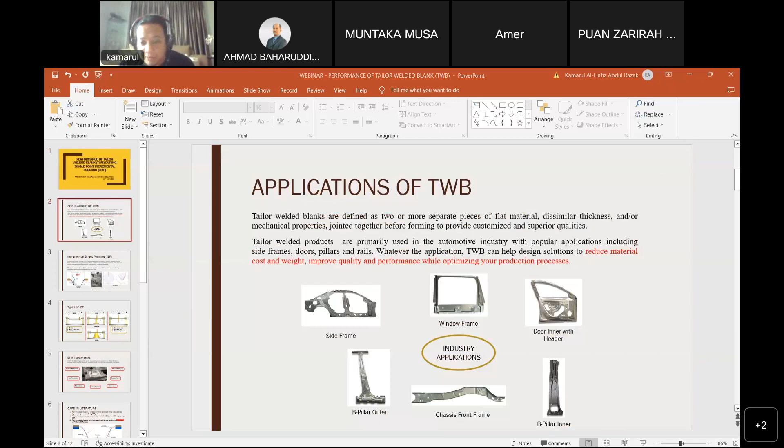Okay. Application of the tailor-welded blank. Sorry to interrupt. Can you change the slide? Yeah. Okay. Sorry. All right.

Tailor-welded blanks are defined as two or more separate pieces of flat material, dissimilar thickness and/or mechanical properties, joined together before forming to provide customized and superior qualities. This is the advantage of the tailor-welded blank. Tailor-welded blanks are also widely used in the automotive industry, including side frames, pillars, rails, and other applications. Tailor-welded blanks can help design solutions reduce material cost and weight, improve quality and performance, while optimizing production processes.

So this is an example of the application of tailor-welded blanks in industry. We have combinations of different materials or different thicknesses to reduce the weight of the body in white, such as the window frame, B pillar outer and inner, door inner, header, and chassis front frame.

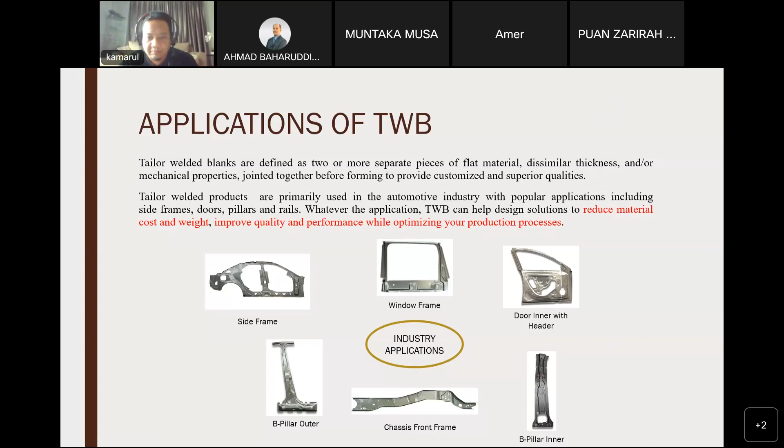Okay, I would like to share about the process of incremental sheet forming. Incremental sheet forming is a process in which a sheet is shaped into the final part shape by progressively applying small increments of deformation using a round tip or hemispherical head tool. Typically, the diameter of the forming tool is in the range of 5 to 20 mm. The tool is mounted on a CNC machine or robot arm, and its motion is controlled by a computer program that generates the tool path.

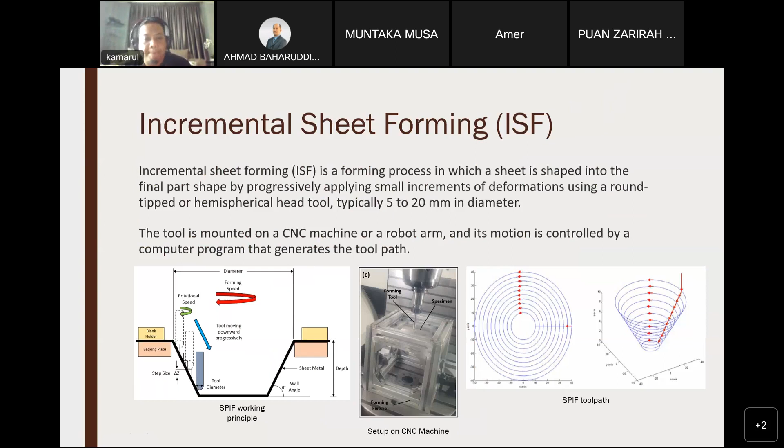Okay, before I go further, I want to share the different processes in ISF. In ISF, there are majorly three types of incremental sheet forming. The first one is single point incremental forming. Single point incremental forming consists of only one rotating tool and is a dieless process. So this is a very simple setup, and the process is without a die. The setup process is also easy, and the setup cost does not include the die.

By rotating the tool, then form the shape into a required design. The second one is two-point incremental forming, TPIF. Different from SPIF, TPIF has a die, but some researchers divide TPIF into two types: the first one is a partial die, the second one is a full die. So SPIF is dieless, without a die, but TPIF has a die, which is partial or full. And the third one is double-sided incremental forming.

Different from SPIF and TPIF, DSIF has two rotating tools at the top and the bottom of the fixtures. So both forming tools rotate and move together to form the desired shape. So DSIF requires highly complex programming and also high setup cost compared to SPIF and TPIF.

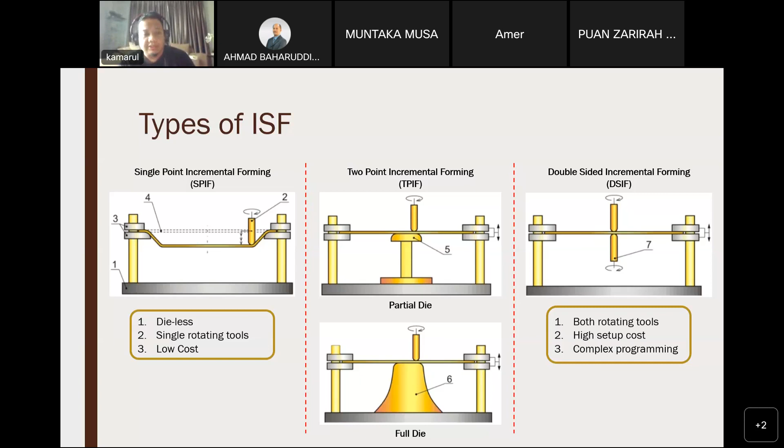Okay, my study is focused on SPIF. In SPIF, there are some important process parameters such as rotational speed, feed rate, step size, forming angle, or what some researchers call wall angle, lubricant, tool diameter, and sheet thickness. But in my research study, I just focus on four parameters, which are rotational speed, feed rate, step size, and forming angle. The other parameters I try to fix, such as sheet thickness, tool diameter, and the lubricant.

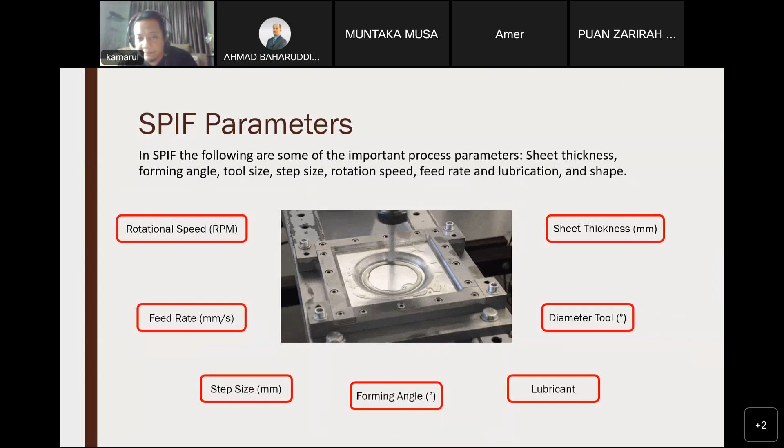Okay. Gaps in the literature. From the available literature, it can be summarized that there is a limited understanding of the input process parameters affecting SPIF performance. Number two, limited work has been reported on the dissimilar tailored AA6061 and AA5052 alloy using SPIF. And the last one, from the available literature, no or limited research work has been found on the springback of tailored blanks using the SPIF process.

Actually, this is quite interesting in my research study because it is quite novel, as I found when I made a study in my previous semester. There's very limited work on the combination of SPIF and tailored blanks. Several researchers combine the SPIF process with a tailored blank as a specimen, but almost all the research focuses on formability. But until now, I have not found other research that focuses on the springback that occurs when the SPIF process forms the tailored blank specimen.

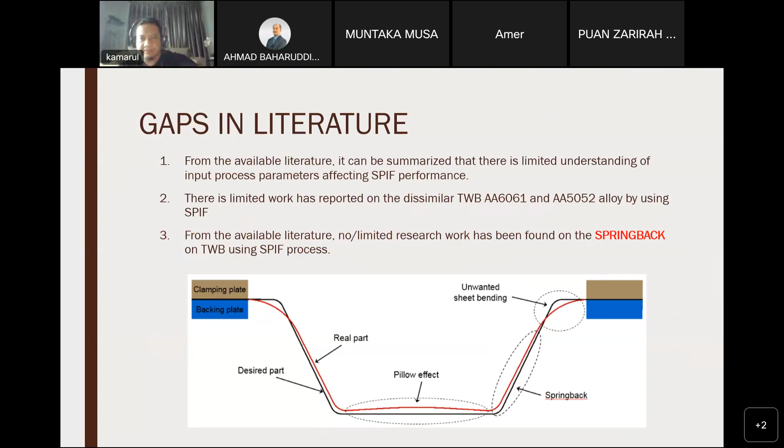So after we prepare the samples, the next step is to prepare the design of experiment using the Taguchi method. Like I said just now, I pick four parameters, which are rotational speed, forming speed, step size, and wall angle, with three levels. Then we try to run the SPIF process. If it fails, we try to make some alteration or amendment to the process parameters. And if the part is successfully formed, then I measure the springback angles.

So actually, for the parameters, I already made some research and also referred to previous researchers because, like I said just now, previous researchers focused on formability, but they still ran the SPIF process. So I take their parameters as a reference, but for some parameters I'm not sure whether they are valid or maybe have a typing error in that paper, because I followed several parameters but it failed when I tested on my specimen. So at that time I took several attempts to change the parameters.

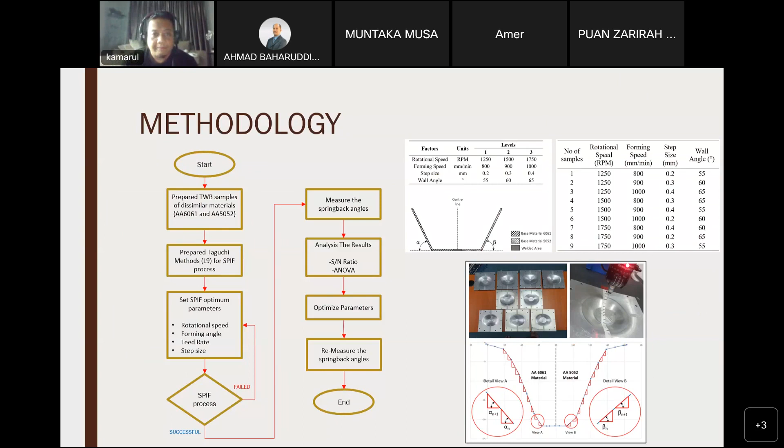Okay, the result. So this is how to measure the spring back: after we find the average angle of spring back, the standard calculation of the spring back is actual spring back minus design spring back. Then we find the actual spring back.

Okay, so based on the nine samples, sample 8 produces very little spring back on both sides. The 6061 material produces a slight difference between the actual and design angle, which is 2.285 degrees. For the other side, the 5052 material produces 2.6622 degrees, slightly different from the 65 degree design wall angle.

Okay, so on the SN ratio based on Taguchi analysis, we can see that for spring back on AA6061, the optimum value for rotational speed is 1750, forming speed is 900, step size is 0.2 mm, and wall angle is 65 degrees. Same goes for spring back on the AA5052 side. It also gives the same output on the optimum parameter. Both sides have less spring back compared to the other samples.

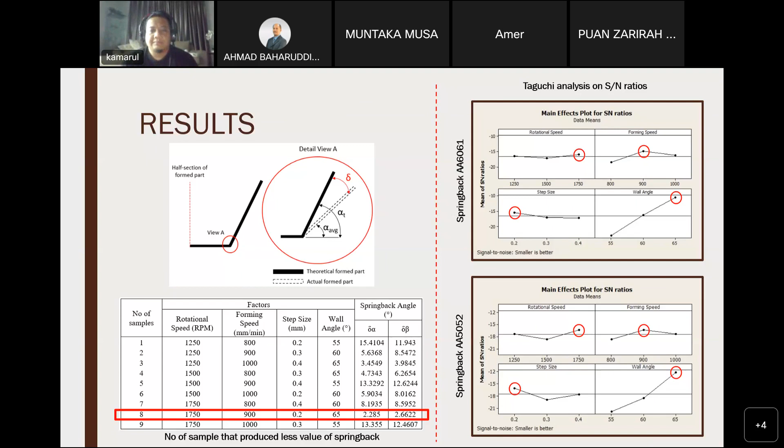Okay, as a summary, based on the Taguchi method, the SN ratio results show the wall angle is a significant parameter that influences the spring back compared to other parameters on both material sides. While rotational speed, in the last rank, shows it doesn't have a significant effect on the spring back angle. The ranking of the SN ratio will show the ranking of the significant parameters.

So for spring back on 6061, the wall angle is very significant. The second one is forming speed. The third one is step size, and the last one is rotational speed. On the 5052 side, they have the same significant parameter, which is the wall angle, and also the least significant, which is rotational speed, but the result is quite different between forming speed and step size. The optimal values for rotational speed, forming speed, step size, and wall angle are determined using the rank of significant parameters, like I explained just now.

Okay, then according to the ANOVA result, the wall angle has a greater percentage effect on the spring back angle of the formed tailor welded blank, which is 94.73% for mean spring back on 6061, and 93.18% for the 5052 side. That contribution is high because using ANOVA, we usually have significance at 95%. So less than 95% is a very high contribution.

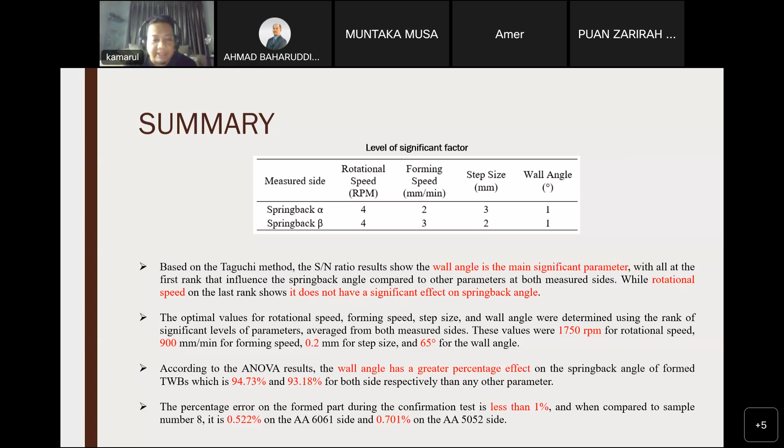Okay, this is the challenge during this process when I combine together the SPIF process and tailor welded blank. Actually, in this process, the challenge started when providing the sample itself, because when the material thickness is very thin, it's very difficult to weld. It's very difficult to weld due to the warpage issue and also defect issues during the process, because friction stir welding also produces high residual stress, and also the heat distribution.

So when the specimen is thin, 1 mm or less, the possibility of failure and warpage is very high. Whereas if our sheet is thin, 1 mm or less, it's easy to form. But if the specimen is quite thick, maybe 2 mm and above, it's very easy to weld. There is no warpage at all if we use 2 mm material thickness. But it's very difficult to form.

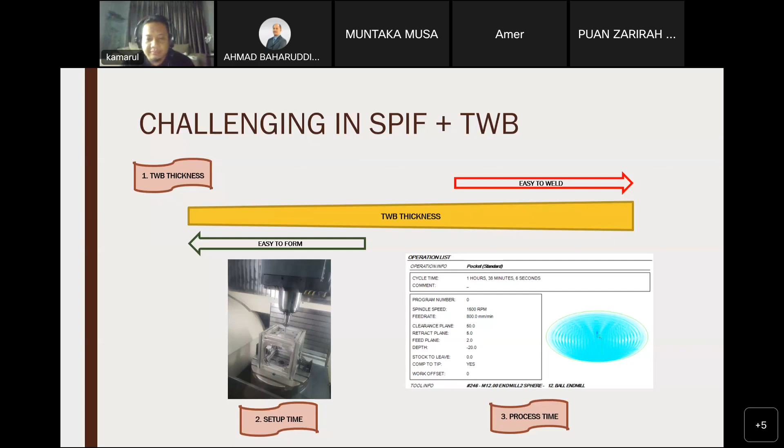Then any effect on the base metal, and also what is different between the base metal structure and the tailor welded blank structure. Is there any significant effect on that area? Because I will go into the thickness distribution and also the microstructure in that area. This is my next plan.

The second one, I would like to investigate the improvement of spring back angle reduction by a combination process, which means I try to introduce a new process, which is reverse single point incremental forming. The common SPIF is in one direction only, from the downward position only. But when I studied several processes, SPIF has a lack of geometric accuracy compared to TPIF and DSIF. DSIF and TPIF both have some force at the bottom of the fixtures.

So I am Amer Isyraqi bin Hussin, a PhD student from Metal Forming Research Lab, USM. Today I would like to share my findings from my current study, which is about the effects of joint configurations of tailor welded blanks on crashworthiness behavior. Before I begin, let me introduce a little bit about tailor welded blanks and crashworthiness.

Crashworthiness is the ability of the vehicle to protect its occupants during an impact or accident. The ultimate goal of crashworthiness is to protect occupants in a wide range of crash scenarios and reduce the risk of injury or death in the event of an accident. Side impact, also known as a crash test, is one of the most hazardous crashes, causing deaths and injuries around the world. The side impact on a car structure involves the roof rail, B-pillar, and sill.

One of the methods to reduce the risk during side collision is strengthening the B-pillar structure, such as friction stir welding for joining purposes or using advanced materials. In a study by Kelley, they found that scapular fracture or shoulder injury was influenced by the B-pillar in most cases of side collisions. Investigating the joint configuration of friction stir welding for tailor welded blanks is considered an alternative approach to enhance and strengthen automotive structures, thereby improving their crashworthiness.

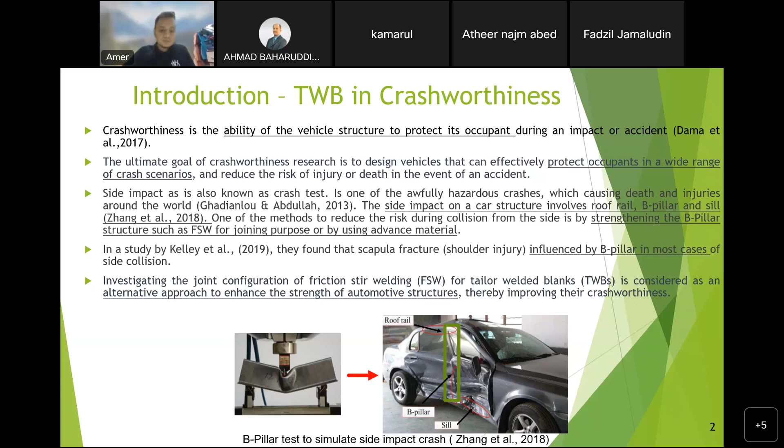It provides support to the vehicle roof, helps maintain the structural integrity of the passenger compartment, and serves as an attachment point for the seat belt and other safety systems. In some vehicles, the B-pillar may also house airbags or other safety features.

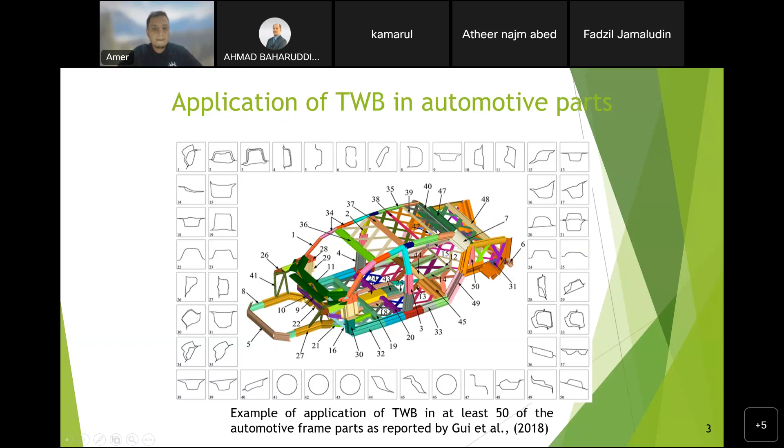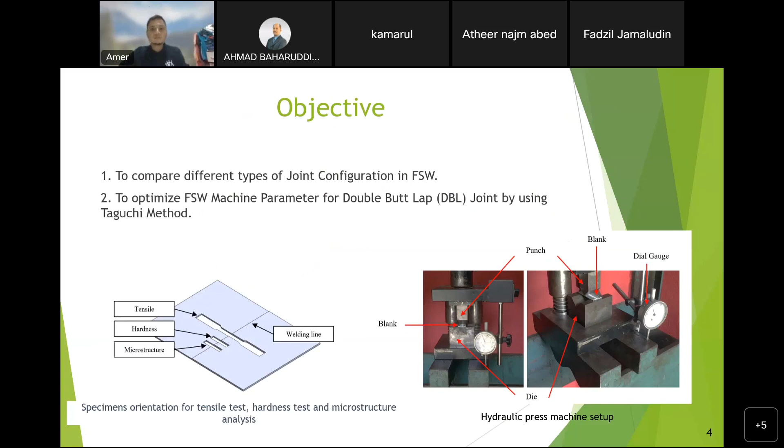Basically, the types of joint configuration in friction stir welding are the same as in arc welding. For example, the typical types of joint configurations are square butt joint, edge butt joint, T butt joint, lap joint, multiple lap joint, T lap joint, and fillet joints. On the right side is the joint configuration for the modified square butt joint, which has been improved to a new shape, called a scarf joint and double butt lap joint.

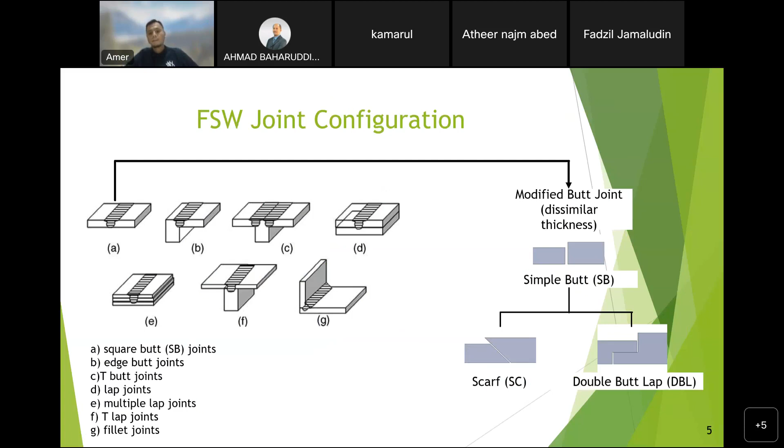So this is the methodology for my experiments. In order to make a comparison between the three types of joints, the same parameters have been used for tool design, material size, machine types, and machine parameter.

For the friction stir welding tool, I'm using D2 tool steel, and the shape of the pin is straight cylindrical. The pin length is 1 mm, pin diameter 5 mm, shoulder length 10 mm, shoulder diameter 10 mm.

For the variable parameter, different rolling angles are used for each type of joint. There are 4 types of joint angle combinations carried out: 0-0 degree, 90-90 degree, 90-0 degree, and 0-90 degree.

The material used for this friction stir welding comparison is aluminium 6061. The thickness for the advancing side is 2 mm and the retreating side is 1.5 mm. The dimensions are 200 by 90 mm. The three types of joint configuration for the comparison are square butt, scarf, and double butt lap joint.

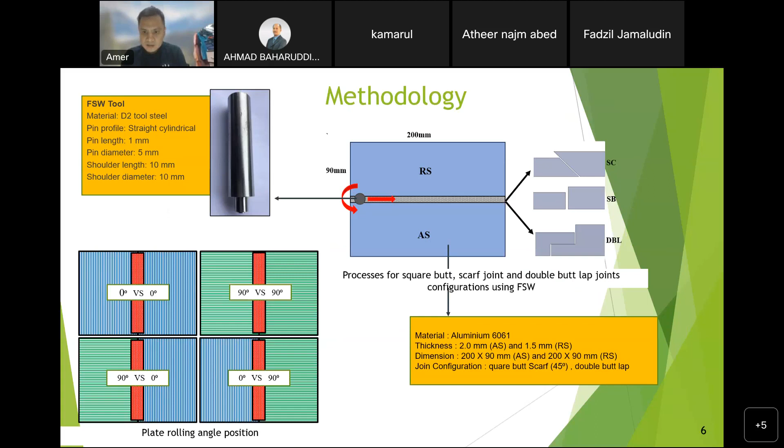So this is the flow of the experiments. Start with the friction stir welding process, then the sample preparation, and the last one is the analysis.

For the friction stir welding, I'm using a conventional universal milling machine. The fixed parameters for the process are spindle speed 865 RPM, welding speed 90 mm per minute, and tool tilt angle 3 degrees.

For the sample preparation for tensile, hardness, and microstructure, I'm using EDM wire cut to cut the specimen profile. For mounting or holding the specimen, I'm using a specimen mounting press, for microstructure and hardness tests.

Next is the analysis. The analysis is for comparison using the tensile test with a UTM machine, hardness test using a Vickers hardness tester, and microstructure analysis using an optical microscope and SEM machine.

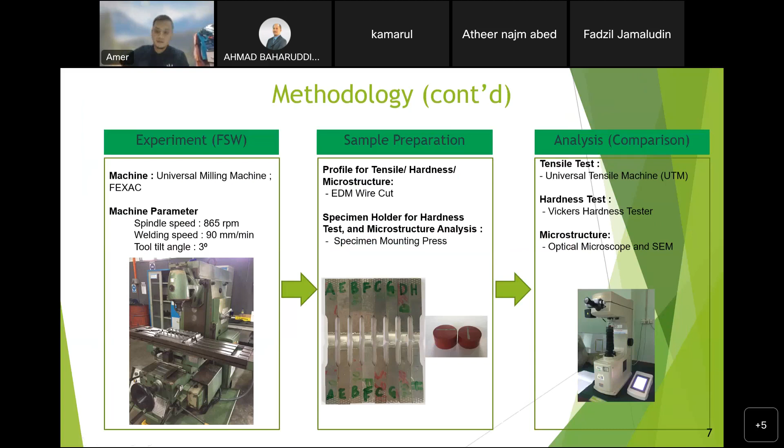So this is the results, comparison on ultimate tensile strength results. The UTS value for each rolling angle is different. From the chart, it can be seen that a combination of different rolling angle values gives a higher value compared to the joint that has the same rolling angle values.

We can see that DBL, or double butt lap joint, is better than square butt joint configuration by 3 to 11%, and much better than scarf joint configuration by 2 to 6%. The best rolling angle is the combination of 90 and 0 rolling angle for all types of joints.

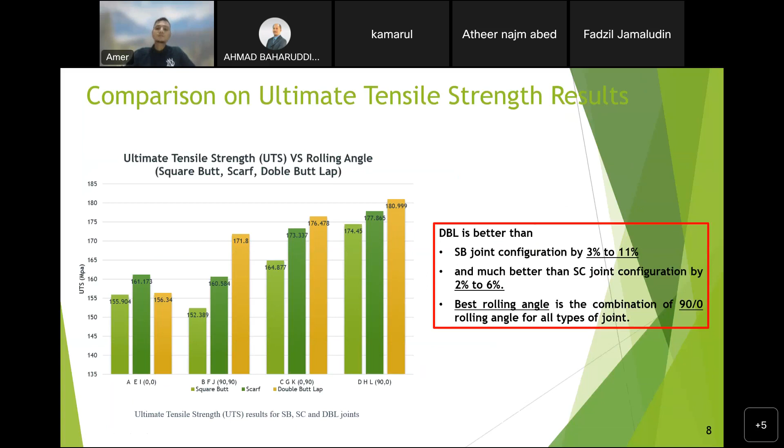Next is the comparison of the hardness HV results. To form the hardness profile, the hardness value is measured every 2 mm from end to end, including all the stir zone and material base area.

As we can see, by changing the geometry of the joint from square butt, to scarf joint, or DBL double butt lap joint, we can increase the hardness value on the stir zones. However, the hardness value between the scarf and double butt joint will not be significantly different.

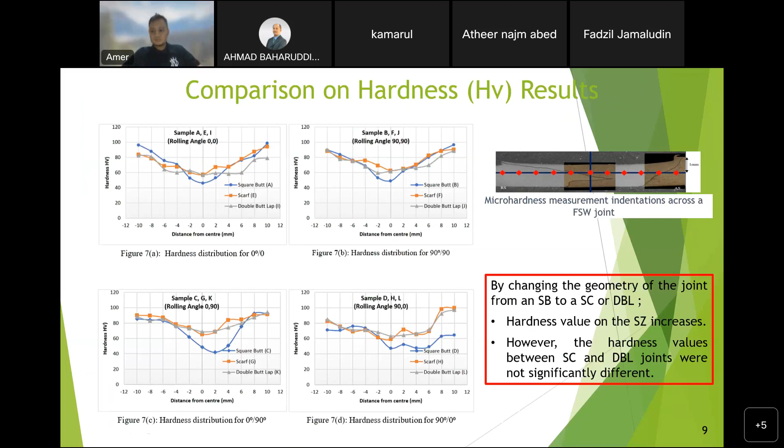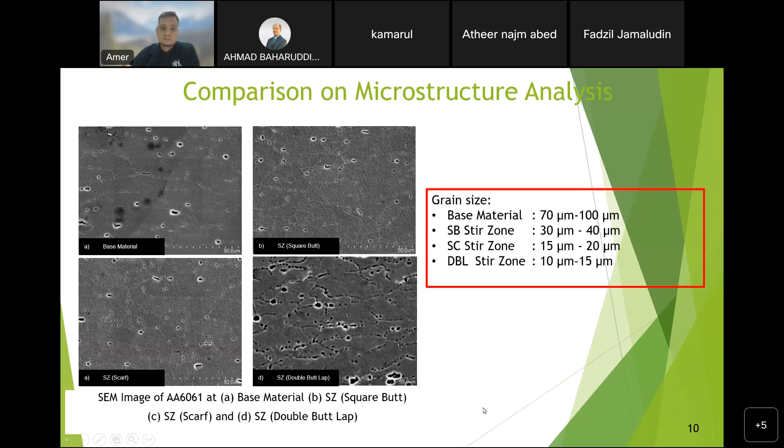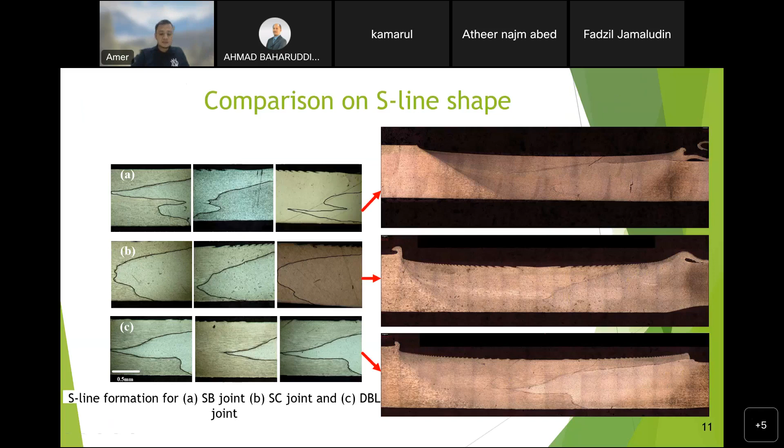So which of the joints is better: square butt, scarf, or double butt? Based on the tensile results, it was found that the UTS for the double butt lap joint is better than the square butt joint configuration by 3 to 11%, and much better than the scarf joint configuration by 2 to 6%.

By changing the geometry of the joint from square butt to scarf joint or double butt lap joint, it has been observed that the hardness value of the stir zone increased. However, the hardness values between scarf and double butt lap joint were not significantly different.

By increasing the contact area of the faying surface, the volume of material that needs to be pumped into the weld root is enhanced, resulting in optimal weld formation and consolidation in the weld zone. The double butt lap joint design has proven to be an optimal design strategy for increasing the faying surface, and as a result, improving the mechanical properties of the joint.

Apart from the rolling angle factor, the type of joint influences the S-line profile, where the profile of the three joint types differ.

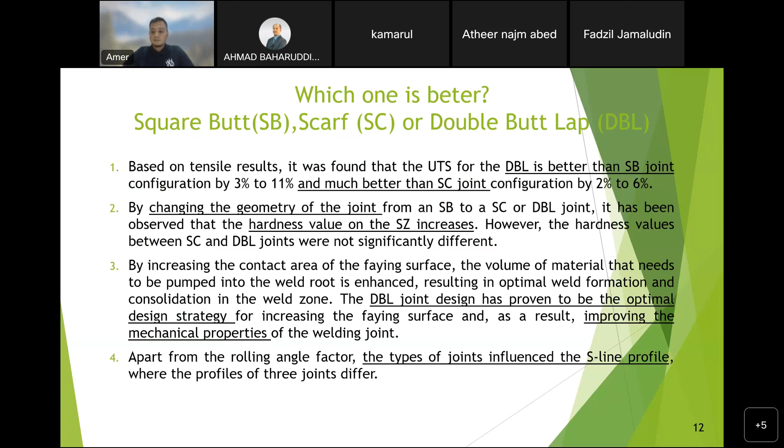Next, we look at my second objective, which is to find the most optimal parameter to get the best spring back value.

To determine the number of experiments and the appropriate combination of parameters, the Taguchi method was used, and all result analysis was done using Minitab software. The Taguchi L9 orthogonal array design lists 9 combinations of different parameters, consisting of 3 levels of spindle speed, 3 levels of feed rate, and 3 levels of tilt angle.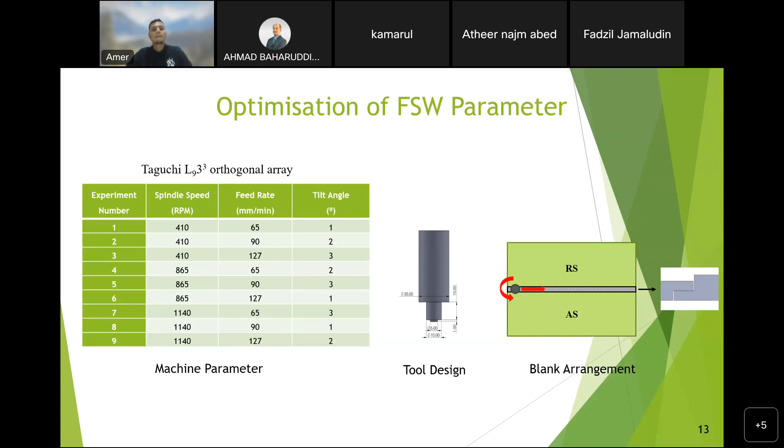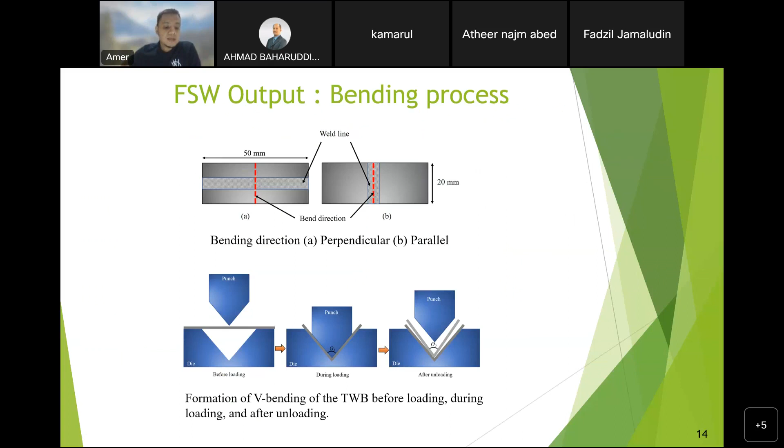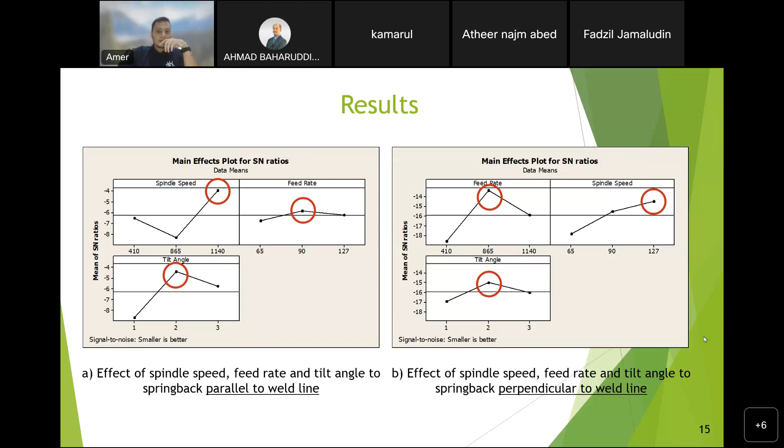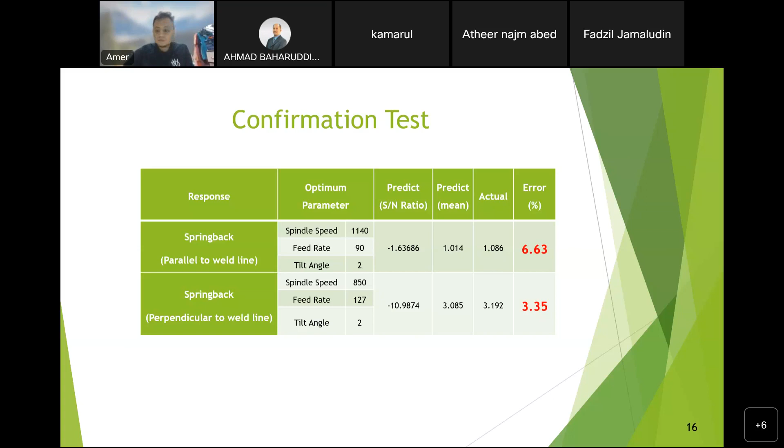So the summary of my two objectives: the first is that the double butt lap joint is better than the square butt joint configuration by 3 to 11%, and much better than the scarf joint configuration by 2 to 6% in terms of tensile results.

Based on the investigations, it was determined that the optimal parameter setting for spring back parallel to the weld lines were 1140 RPM spindle speed, 90 mm per minute feed rate, and 2-degree tilt angle. For spring back perpendicular to the weld lines, the optimal parameters were 865 RPM spindle speed, 127 mm per minute feed rate, and 2-degree tilt angle, level 2.

As a conclusion, the double butt lap joint is a good alternative for reinforced friction stir welding joints, while simultaneously enhancing the application of tailor-welded blanks in vehicle frames, especially B-pillars, to further improve crashworthiness.